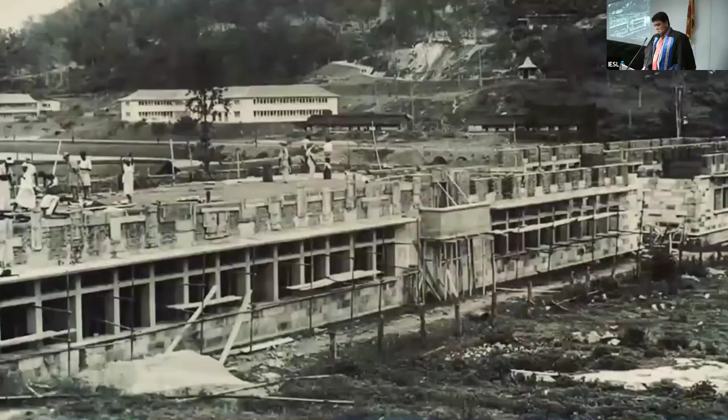As members of the academic and engineering communities, we extend our sincere gratitude to our institution for commemorating the legacy of the late Professor E.O.E. Pereira, widely regarded as the father of modern engineering education in Sri Lanka, through this annual memorial oration. This year's event is particularly significant as it coincides not only with the 118th anniversary of his birth, but also with the 75th Diamond Jubilee of the Faculty of Engineering, which he was instrumental in founding.

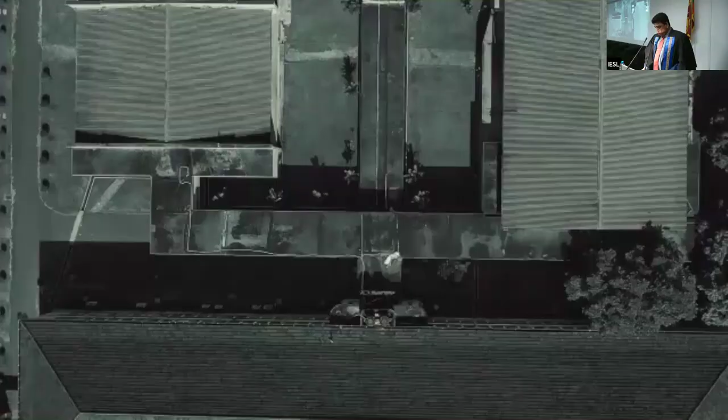At the commencement of this oration, I would like to take a moment to reflect on the enduring legacy of Professor E.O.E. Pereira, whose visionary leadership and unwavering commitment laid the foundation for the advancement of engineering education in Sri Lanka as we know it today. Today, as we gather to honor the memory of Engineer Professor E.O.E. Pereira, we reflect upon the life and legacy of a visionary who not only founded the Faculty of Engineering, but also dedicated himself to shaping it into the distinguished institution it is today.

His efforts extended far beyond the mere establishment of the faculty. He was, in essence, laying the foundations for the future of engineering education in Sri Lanka. Professor Pereira envisioned a faculty that would serve not only the immediate needs of his time, but also endure as a beacon of academic excellence for generations to come. He championed the creation of an institution equipped with spacious lecture halls, state-of-the-art laboratories, and architecturally significant buildings that embodied both scholarly ambition and national pride.

In 1957, when he was asked to scale down his specifications for infrastructure and equipment, he chose to tender his resignation rather than compromise on his vision. This singular act of integrity and courage came to define his character and unwavering commitment. Had Professor Pereira yielded to external pressure, our faculty would not today stand as a symbol of prestige among university institutions in this country, nor would Sri Lanka have been able to cultivate and produce the vast cadre of engineers who now serve both nationally and beyond.

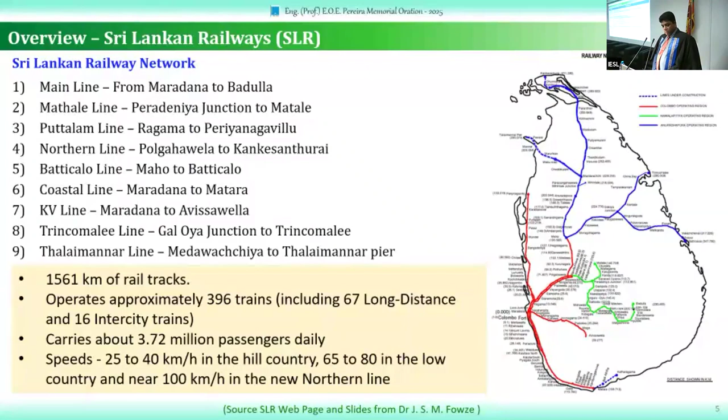If I give some quick key information on the rail track, we have a broad gauge system, 1,676 millimeter broad gauge, which was basically adopted during the British colonial era, in line with Indian railway practice. Our design speed is about 120 kilometers per hour, but the permissible speed is basically about 100 kilometers per hour.

Originally, the sleepers used in these rail tracks were hardwood sleepers, from teak, kumbuk, and jak type of trees. In recent times, we have been using pre-stressed concrete in most areas.

The ballast, which is my key area of research that I will be sharing today, is traditionally rock material - gneiss, granite, biotite. Those are the parent rock materials used for ballast, typically 20 to 63 millimeters in size. The gradation we use is basically adapted from the Indian standard with some adaptation using BS sieve sizes. The ballast thickness varies from 200 to 300 millimeters depending on the class of lines.

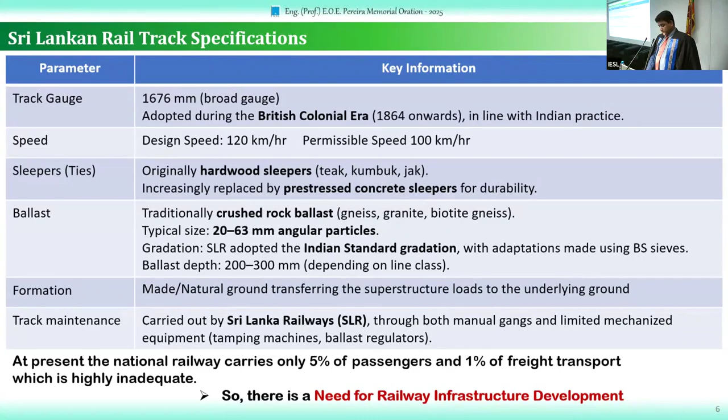Let me talk about this material, ballast, which is one of the key elements in the railway track system. We also know that this railway transport system is one of the most popular modes of transport, not only in many parts of Asia but all over the world.

There are many advantages we have against road transport, and this special ballast material is a traditionally used material. So this ballasted railway system is widely used all over the world. There are key advantages to using this ballast material, which is the main load-bearing material.

It is the one transferring the load from the sleepers to the underlying formations, minimizing the growth of vegetation, providing very good drainage, and also providing lateral resistance. So this is one of the key elements in rail track system.

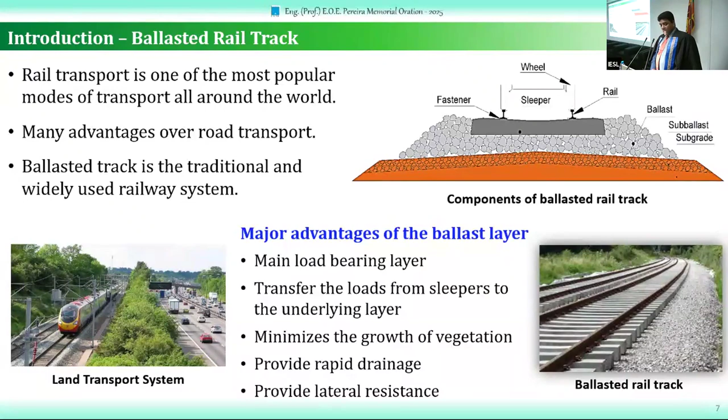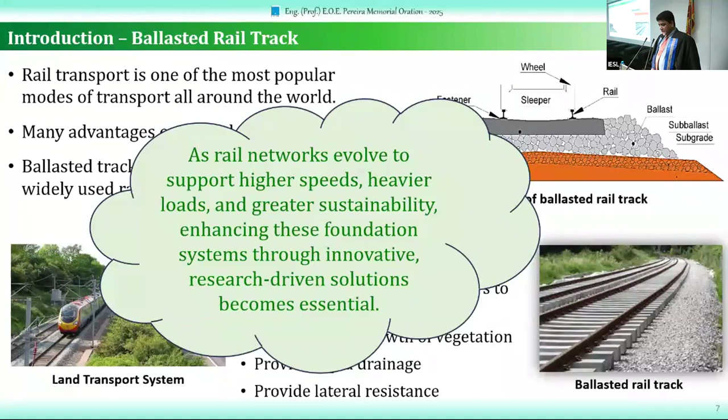As rail networks evolve to support higher speed and heavier loads, that's what we are looking at improving in this railway system, and also looking at greater sustainability. Enhancing this foundation system through innovative research-driven solutions becomes essential, so we need to do something to improve our system.

So for today, I have a number of topics that I will be sharing based on our research and innovations, from academic research to innovative industry applications, starting with ballast gradation for Sri Lanka rail tracks, and impacts of fouling on the shear, degradation and permeability of ballast.

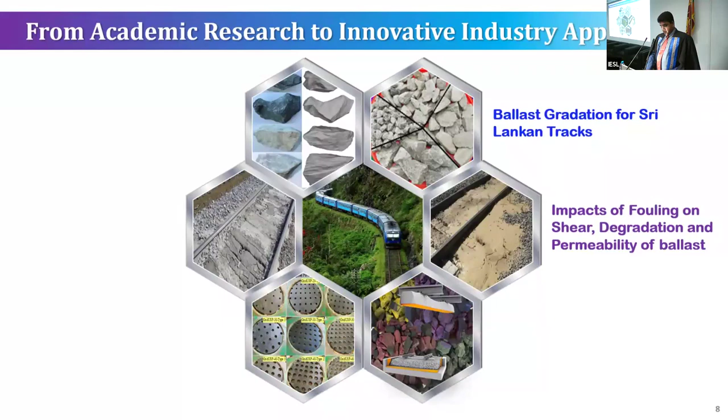Artificial inclusions used in rail track, something like under-sleeper pad, under-ballast mat, and shredded rubber. These are the materials used to stabilize the rail track. And sleeper-ballast interface shear resistance, for which we have come up with a new material. We have applied a patent also for that.

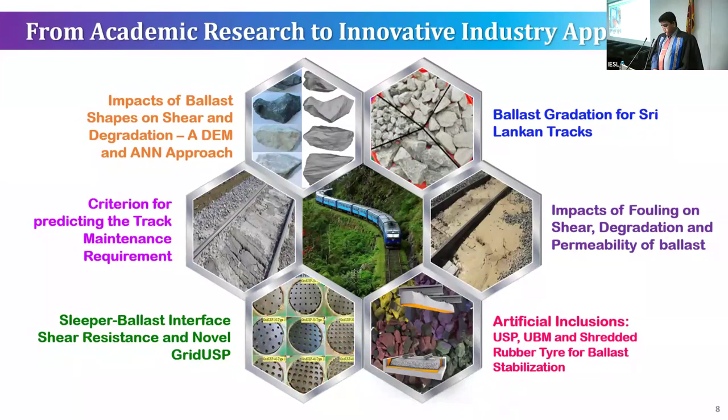And criterion for predicting track maintenance. And lastly, the impact of ballast shapes on shear and degradation using a discrete element model and artificial neural network approach. So before I go into each topic, I just wanted to let others know that...

...at the Department of Civil Engineering, University of Peradeniya, we have built state-of-the-art large-scale testing facilities in the recent past, for the past 5-6 years. The first machine, you can see, is the large-scale dynamic actuator, where you can test a real rail track in the laboratory.

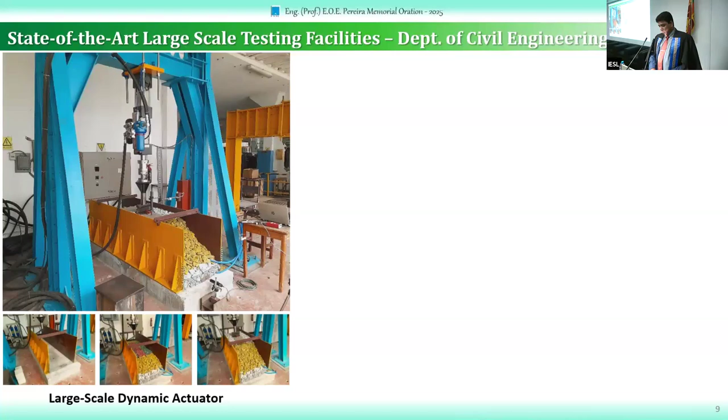The rail track underneath this machine is a unit cell of an actual rail track. The second equipment we custom-built at the department is a direct shear apparatus, where we can test full-size ballast material.

And again, the third one is the large-scale constant head permeability apparatus, where we can do this full-size material testing. These types of large-scale testing apparatus are very, very important for this type of railway material testing, because this ballast material, coarse granular material, size ranges from 20 to 65, where traditional testing equipment won't fit these material sizes.

So we need to either downgrade the size, something like a parallel gradation, or we have to go for a large-scale apparatus. Downgrading the size with parallel gradation gives a lot of limitations. So, based on the experience I gathered at the University of Wollongong, Australia, for the last 6 years, we have been building these pieces of equipment where we can test many different things about railways.

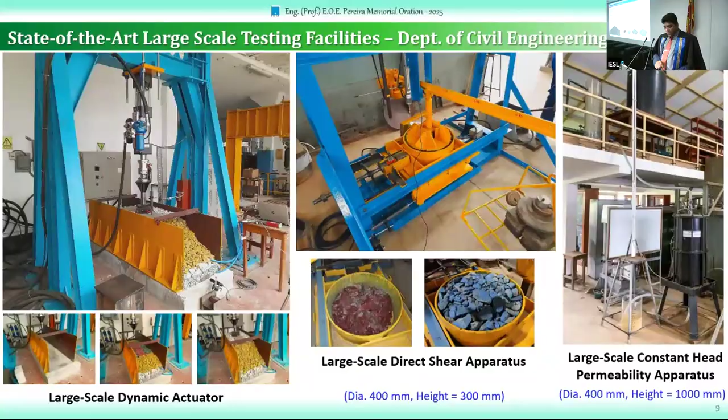So the first topic, the gradation of the Sri Lankan tracks. See, the particle size distribution, the coarse granular material used in rail track, is to give the shear strength of the track when the train is passing through it. So it is a very good material for the shear strength.

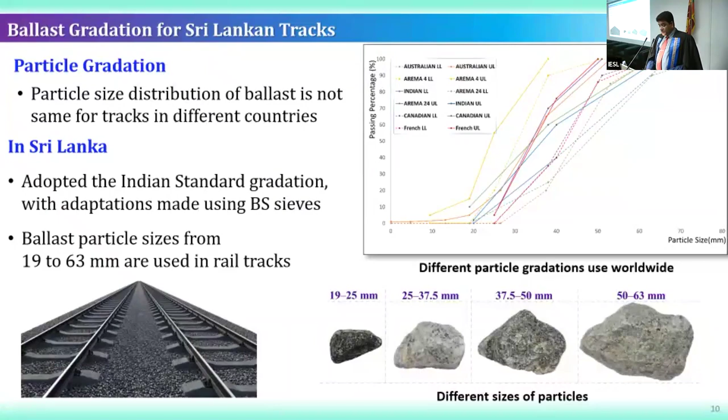But until now, we are practicing with the Indian standard gradation, which is adapted from that system, and we are changing it a little bit with the BS sieve sizes. The ballast particle, as I already said, ranges from 19 to 63. You can see the ballast gradations of various countries and how they differ. But we don't have a ballast gradation for Sri Lanka, and we are using the Indian standard gradation.

So considering that, our project team came up with a plan: why not produce our own gradation? For that, this is an ongoing project. We have so far collected materials from 7 places that are supplying ballast material to the railway system in Sri Lanka. We have collected the material and tested most of the sites, and there are still a few more sites to test.

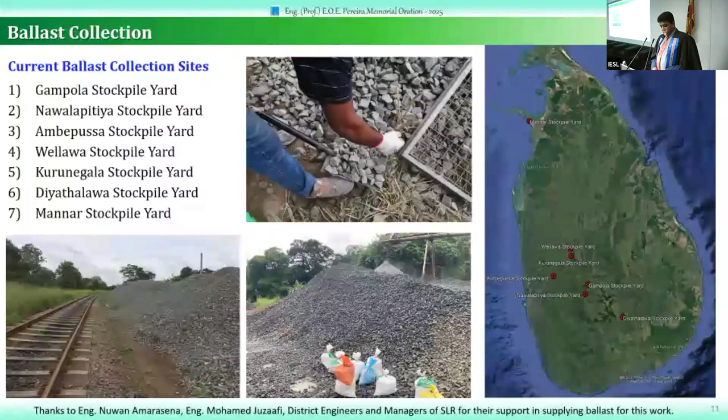At this time, I just wanted to thank Engineer Nuwan Amarasena and Engineer Mohamed Juzaafi at the SLR for supporting us in getting this material, and also the district engineers of these different places and the managers for getting this material to our laboratories.

So we wanted to check the gradation a little outside the Indian gradation range to check whether there is any better gradation we can adopt. We considered 3 different gradations: one at the middle of the Indian gradation range, and 2 outside the range.

The one outside the range on one side, we increased the smaller size particles, while on the other side, we increased the larger size particles. So there are 3 different gradations, and we used this material to test in our large-scale testing apparatus.

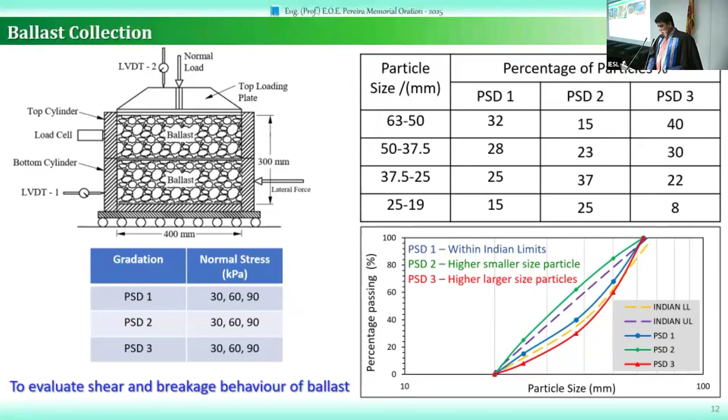You can see here we are coloring the ballast particles. That is because after the testing we wanted to analyze how these particles are degraded. So the different layers we are putting different colors, so that after the test we can separate based on the color and analyze how much the material degraded or broke during this direct shear testing.

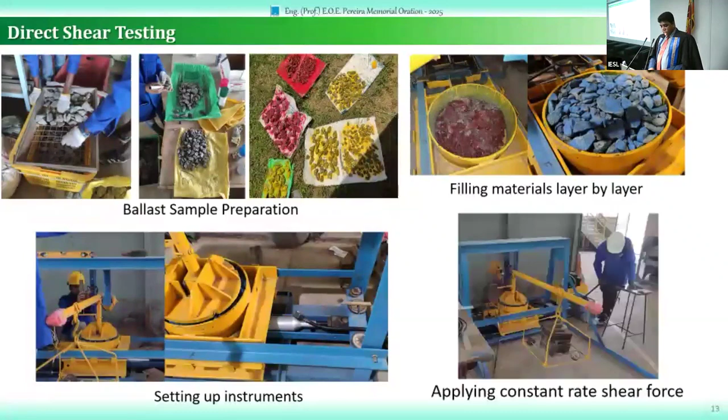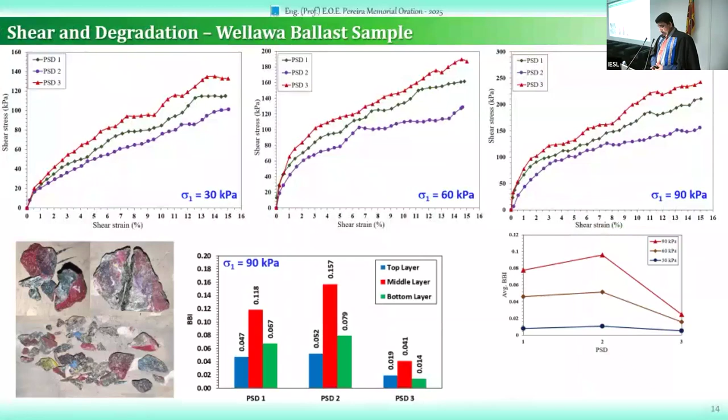Based on these findings, we come up with this conclusion: PSD3, which has a larger amount of larger size particles, is performing better than the Indian gradation limit, and also better than the smaller particle gradation we checked. So not only does it enhance the shear, it also reduces ballast degradation. Ballast degradation is one of the key parameters which decide how frequently you need to do track maintenance. So reducing the ballast degradation is one advantage where you can delay the maintenance work and save money and time.

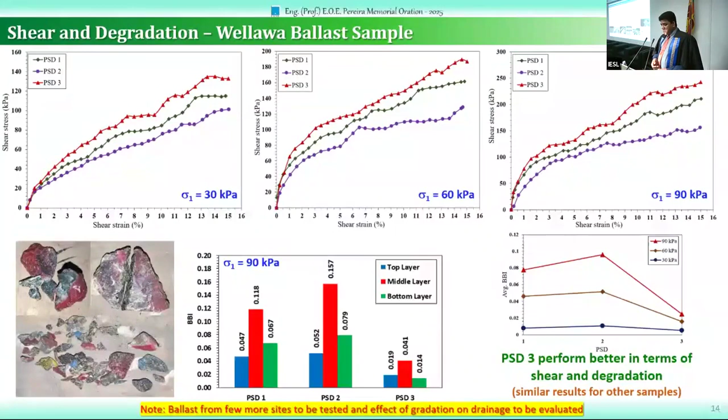As I said, this project is an ongoing project. We still have to test more material from the sites. And not only the shear test, we have to do the permeability test also for this material. Even though these coarse granular materials are good in permeability, there is one other item I'll be discussing here: ballast fouling. When the ballast gets fouled, the permeability is a problem. So we need to check for different gradations what happens when the ballast is fouling.

What is ballast fouling? Ballast fouling is whatever foreign material gets into this ballast layer. Basically, material size less than the 9.5 millimeter sieve is called foul material. This comes from many different sources: particles from abrasion, corner breakage, and splitting of existing ballast particles while the train is in service, and infiltration of fine foreign particles from the track surface, especially during coal transport.

This is a biggest problem in Australian rail tracks, because coal always spills on the rail track and contaminates the ballast layer. Subballast and subgrade infiltration by pumping of fines from the sublayers, especially in coastal areas - when the train is running, cyclic load pumps this fine underneath layer up to contaminate the ballast layer. Also, in some cases, the concrete sleeper wears and contaminates the ballast, and particles washed out from water - specifically this type of problem is prominent in hill country tracks. And also wind blown sand particles near desert and beach areas - that is also one way that ballast gets fouled.

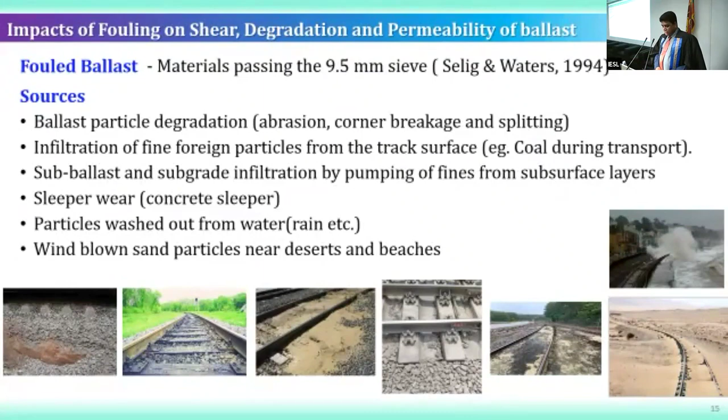We mimic this type of ballast fouling in the laboratory by adding different types of foreign materials - quarry dust, sand foul ballast, clay foul ballast - and we check the shear and permeability behavior of this ballast. We come to a conclusion. We generally found that fresh ballast is very good in shear, but when it is contaminated, especially with clay and sand, it compromises the shear strength.

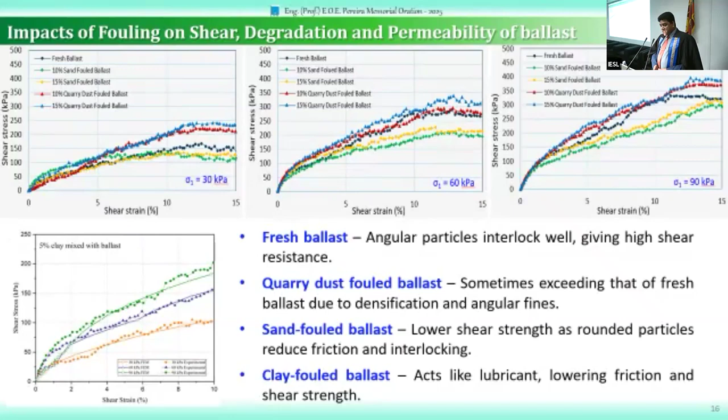Even though this ballast is showing a little higher shear strength, that is because the quarry dust this is coming from has a higher strength, so we are having a higher shear strength. But generally, this foul material is compromising the shear strength. So we have to be very careful about this type of ballast getting fouled.

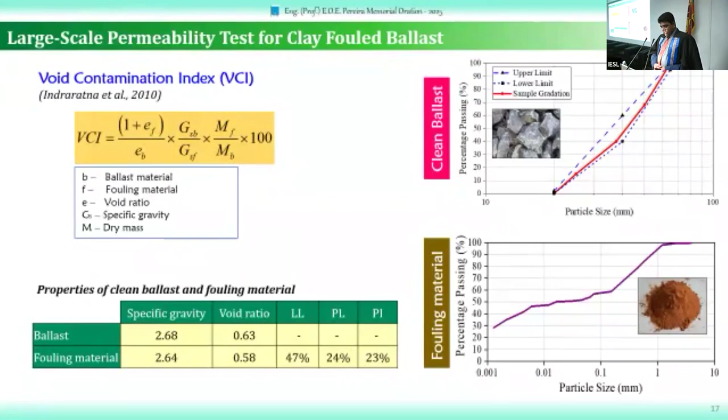Now we know that the ballast gets fouled by this material. We wanted to find a solution, like how we can help railway engineers clean or maintain their tracks whenever this ballast fouling is happening. For that, we started one study by checking the void contamination index - how much void is in the ballast layer - based on the method proposed by Indraratna et al. 2010. We came up with this void contamination index to calculate how much of a layer is contaminated.

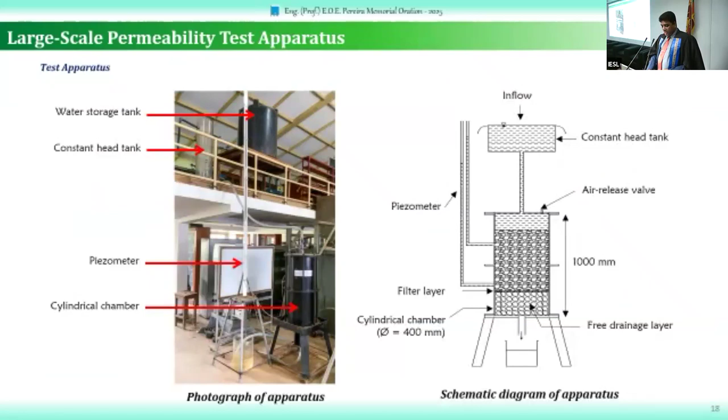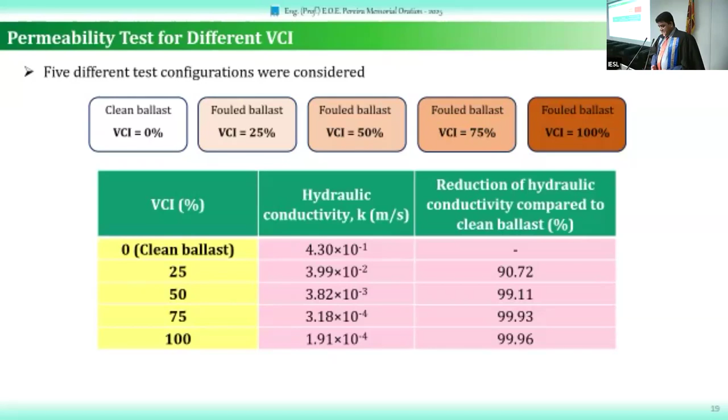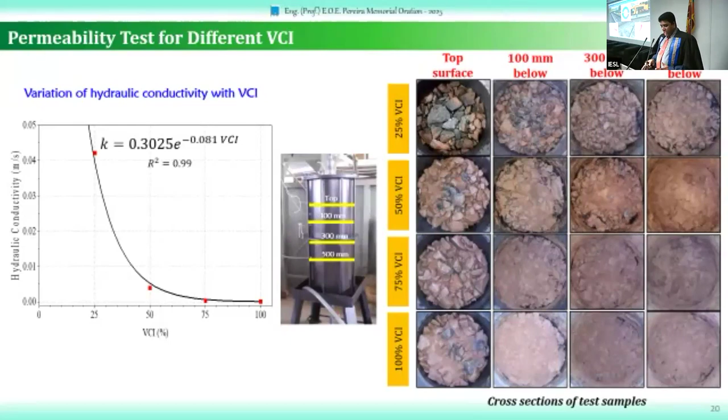We thought of giving a solution for railway engineers, since doing a permeability test and finding how much this material is contaminated is not an easy task, especially in a laboratory. So we thought of coming up with a smaller, simpler test so we can decide whether we need to clean the rail track or not.

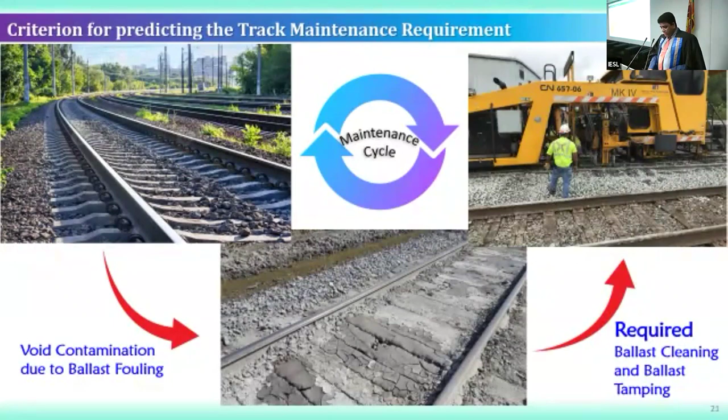So for that, we came up with a 2D numerical model. Based on these results, we developed this numerical model for various levels of fouling in the track system, like the shoulder ballast system and the middle ballast layer. We introduced different levels of contamination and checked the drainage capacity, comparing it with a critical drainage capacity, which is based on the rainfall of that area.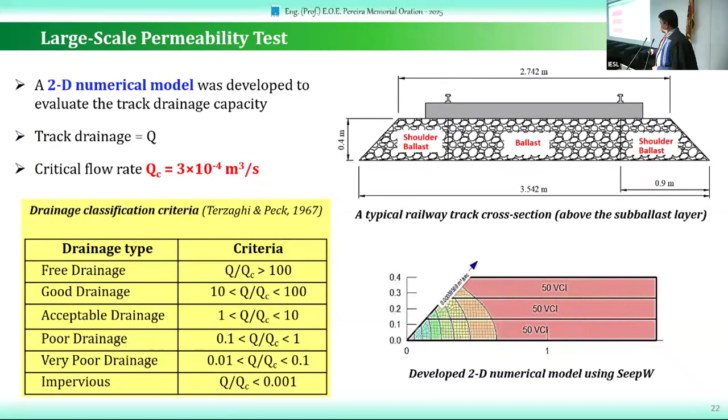So when we know the rainfall of a particular area, we can come up with this critical drainage value. Then, by doing many permeability tests in the laboratory based on the Terzaghi and Peck 1967 criteria, and using this numerical model for the various layers, we came up with the criteria. For that, we used 3 different models. The first model is when 2 layers of the ballast layer are contaminated, or if you divide it into 3 layers. And what happens if you have a separate layer called the shoulder ballast layer, when that is contaminated?

Based on our results, railway engineers can collect one sample from the site and simply do a particle size analysis—no need to do the permeability test, which is high-end and not very easy, especially for large scale testing. Just doing one simple sieve analysis test tells you how much contamination is in a particular layer, and by using the chart developed using this QC value...

Whenever you are dealing with a different track, you can come up with a different QC value and make a different chart for that particular rail line. Then, based on this value, your Q over QC, and the contamination value, you calculate the Q over QC ratio. Wherever this Q over QC ratio falls will tell you whether you need maintenance work, whether you need to clean the ballast or not.

So for model 1, model 2, and model 3, based on our findings, model 3 is the most critical one because of this layer. When water enters the rail system during heavy rain, it tries to leave the track in the lateral direction. So when this layer is highly contaminated, the entire track system is damaged—we can see derailment and a lot of damage.

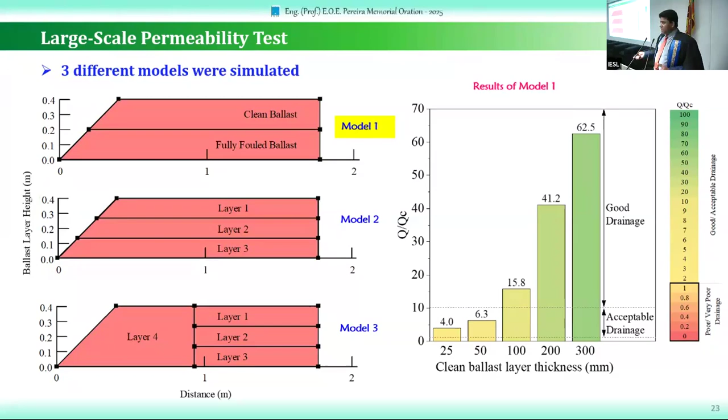So our study shows that with model 3, when the engineer wants to check the conditions of the rail track, they can take one sample here, one sample here, one sample at this level, one sample—4 different samples—just run the particle size distribution and find the Q over QC value. Wherever the Q over QC value fits gives the criteria of whether cleaning or maintenance is required or not.

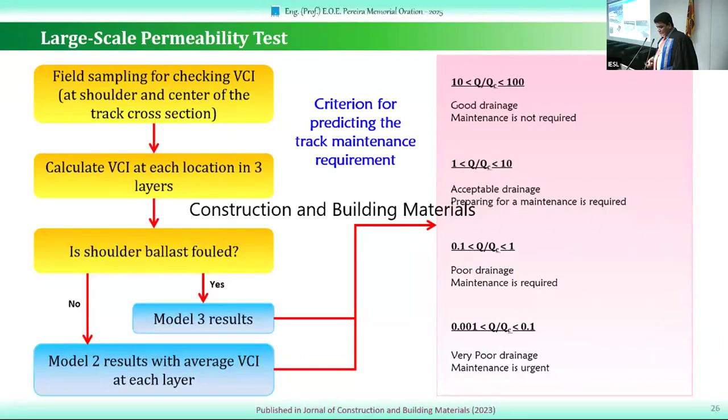So based on the Q over QC value, if it is very high, you don't need maintenance—it already has good drainage. But wherever you have a very low Q over QC value, you need to start cleaning work. Or in some cases, it will tell the railway engineers they need to prepare for maintenance in the coming months. So this type of criterion will help save time and predict problems that may come in the future related to maintenance work. The second work is artificial inclusions for rail track improvements.

Nowadays many researchers are working on how we can improve rail track for faster and heavier trains. In Sri Lanka, we are trying to go more than 100 km/h on most lines, maybe except the upcountry line, which needs a lot of improvement. But whenever we go beyond 100 km/h, that is where we start to face problems.

Degradation, derailment, and vibrations are common problems. These artificial inclusions, such as rubber pads, are very good solutions. There is one called the under sleeper pad, glued directly under the sleeper, and another called the under ballast mat, placed below the ballast layer. These are two different layers where you can introduce and reduce vibration, reduce hard contact between the concrete sleeper and the ballast, and distribute pressure evenly to minimize ballast damage.

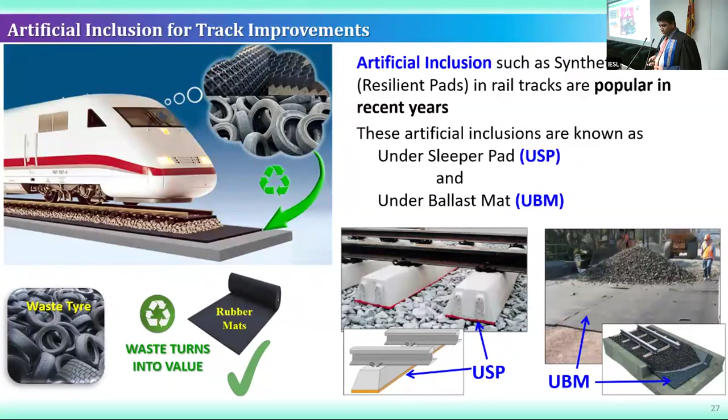These things were tested thanks to the University of Wollongong, Australia, where I tested, and the idea of building the facilities in our department here came from the experience I gathered there. You can see a similar large-scale testing apparatus. I spent about 3 years with this machine, a cyclic dynamic actuator, where we tested the under sleeper pad and under ballast mat.

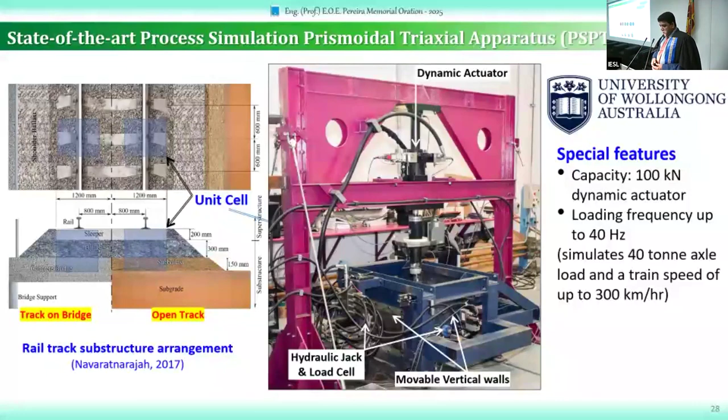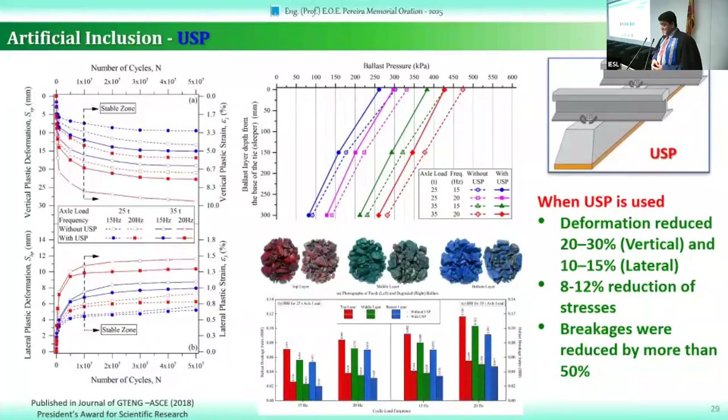The results show very significant improvement when we introduce this under sleeper pad: about 20 to 30% reduction in vertical deformation, 10 to 15% in lateral deformation, reduction of stress up to 12%, and especially the degradation or ballast damage can be reduced more than 50%, which is very significant. You can see the degradation analysis after the testing.

After testing for 5,000 loading cycles, we see this very discrete contact, whereas when you introduce the rubber, the area of contact is significantly more distributed. This clearly tells how hard the contact is between the ballast material and the concrete when discrete, and how introducing the rubber evenly distributes it.

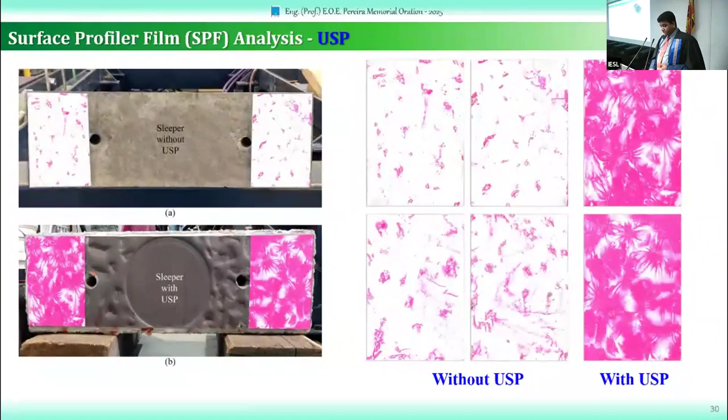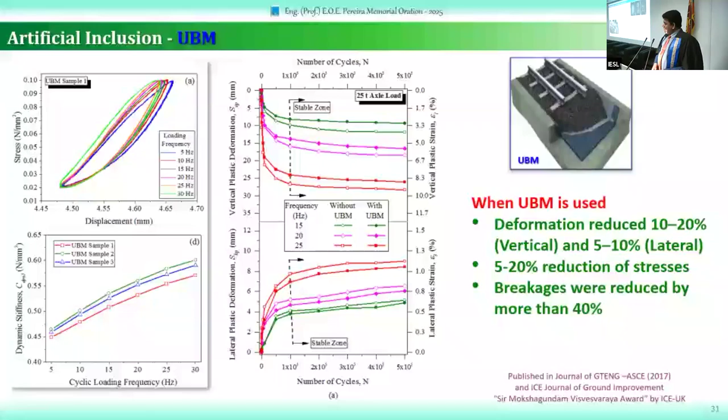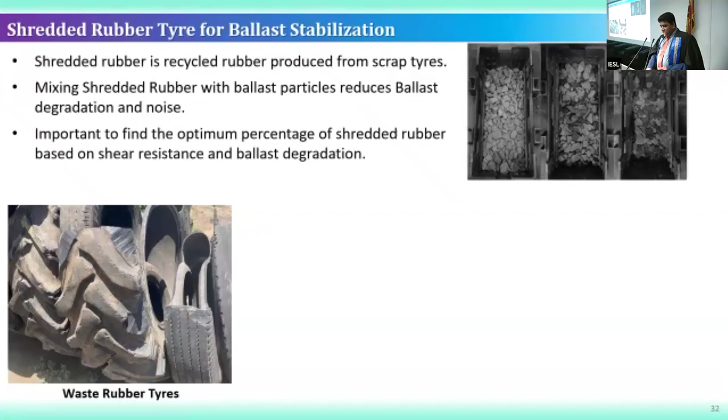Then we have rubber going on top of the ballast layer, and rubber going at the bottom of the ballast layer. Why not rubber in between, or within the ballast layer itself? So we thought of that and introduced testing including rubber particles in the ballast. What we did is take waste tires, especially large tractor tires, cut them to almost the size of the ballast, similar in shape, and mix them into the ballast layer. We tested various things including shear and degradation, and also modeled this in the discrete element model.

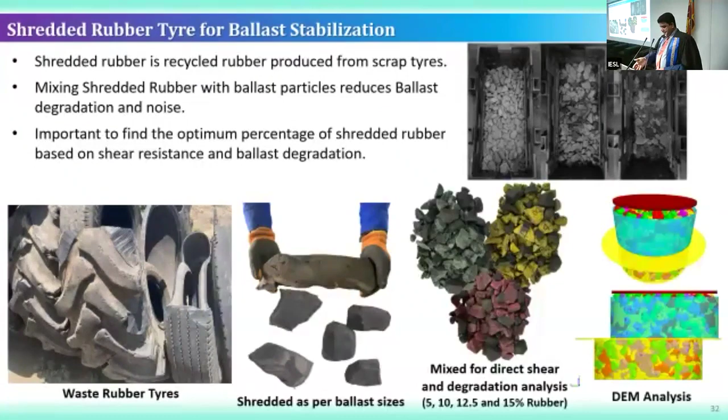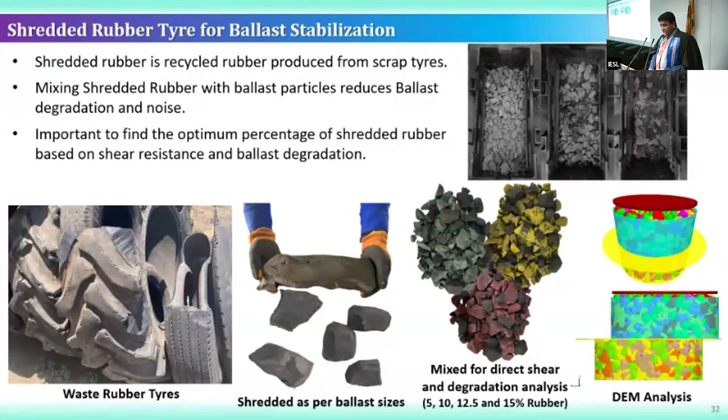This is one of the great tools for this type of ballast material, where granular discrete materials can be easily modeled in the discrete element model rather than the finite element model, which is a continuum model and most of the time not suitable. So we came up with these results. You can see here the discrete element model. Basically what we do is take a realistic ballast particle, scan it with 3D scanning, and take this 3D scanned particle as a CAD particle into the program, which will then deal with the exact ballast particle. That's the speciality of this discrete element model.

So we are testing numerically the actual particles. Based on the numerical and laboratory testing, we found that when introducing 10 to 15% shredded rubber by weight to the ballast layer, we can reduce a significant amount of degradation, even though there is a little compromise in direct shear or shear resistance, as we know these rubber particles have less stiffness than the ballast particle.

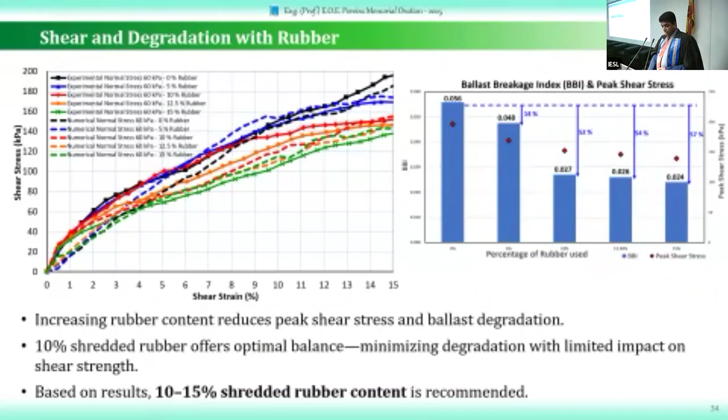That will reduce the shear resistance, but in terms of degradation, we can significantly bring down the degradation level. We have already tested these rubber pads for under sleeper pad and under ballast mat, and they are working well.

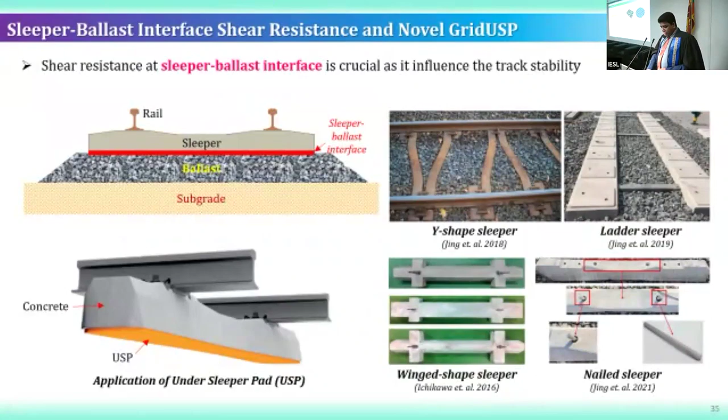In our recent project, where we received a 40 million research grant from the World Bank, the AHEAD project, which we completed two years ago, we came up with modifying this under sleeper pad using a novel grid USP. We know geogrids are used in civil engineering projects, so we thought why not mimic this geogrid into the rubber and make it a geogrid-plus-rubber type material. We came up with this new material and already applied for a patent, which is in progress now.

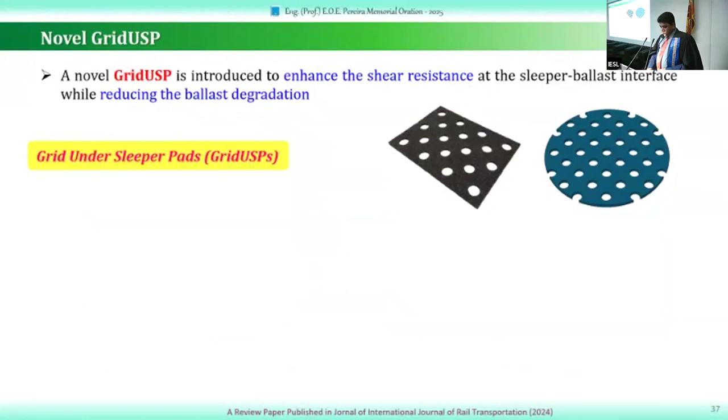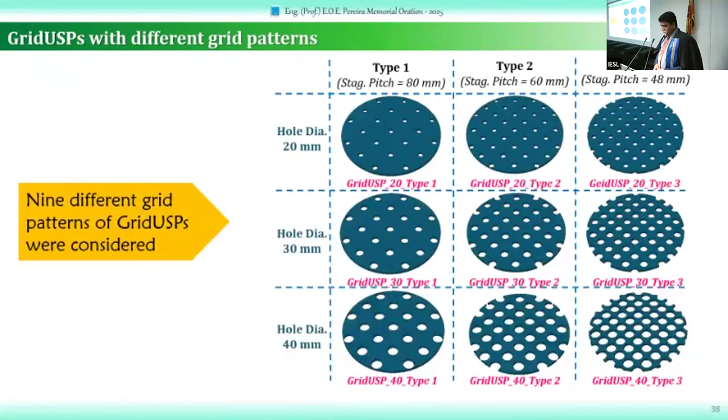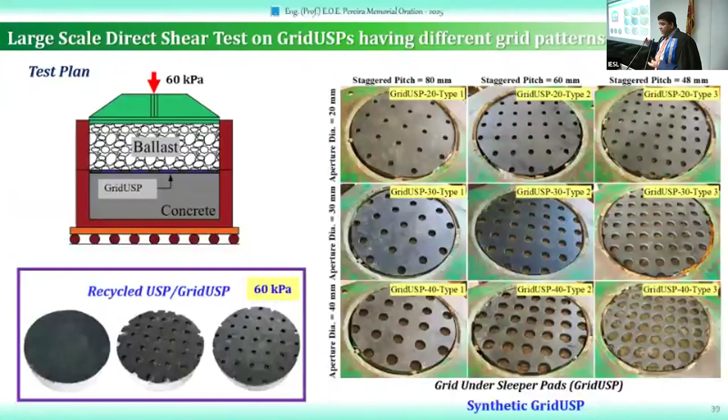We tested this grid under sleeper pad material in the laboratory with various sizes, aperture openings, and spacing. We tested 9 different sections using synthetic rubbers. We also tested recycled rubbers, made from granulated waste tires formed into sheets, and from that rubber we made these grid under sleeper pads.

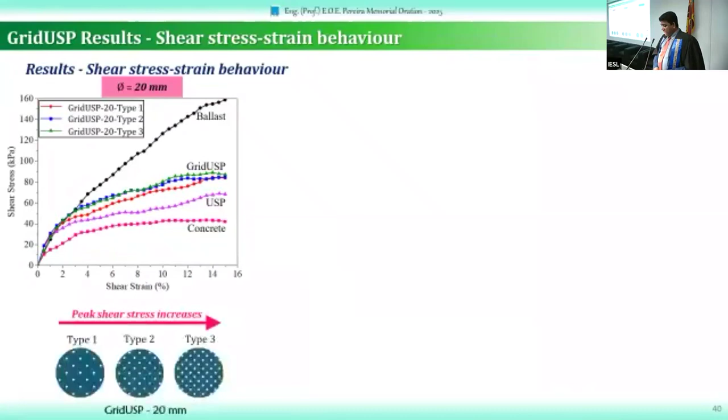The test results are promising. You can see the grid under sleeper pad significantly increased the shear resistance compared to plain rubber, increasing the shear strength of the ballast layer.

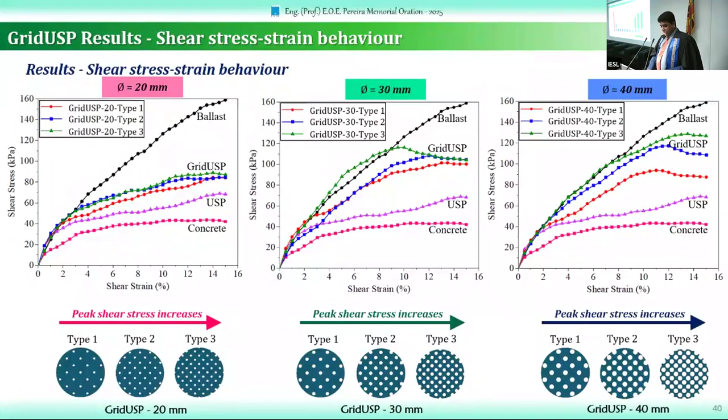For the various cross sections we tested, when we increase the aperture size, the shear strength goes higher, but there are limitations. We cannot make the opening as large as we want, because once the openings get too large, we lose the rubber needed to distribute the load and make the material surface act as a cushion.

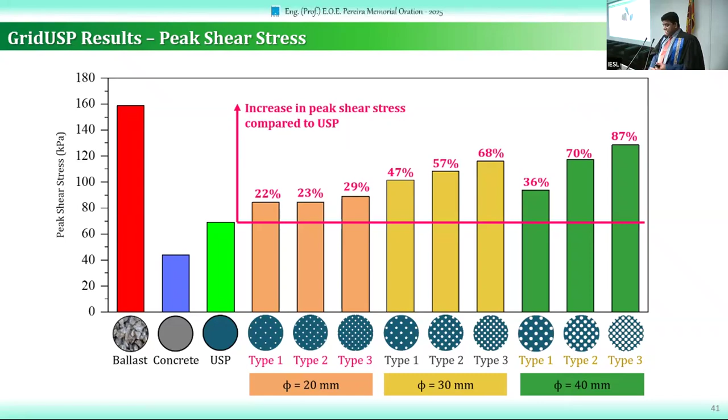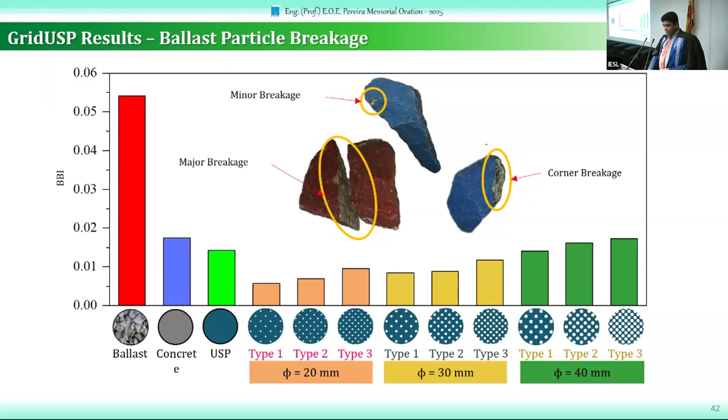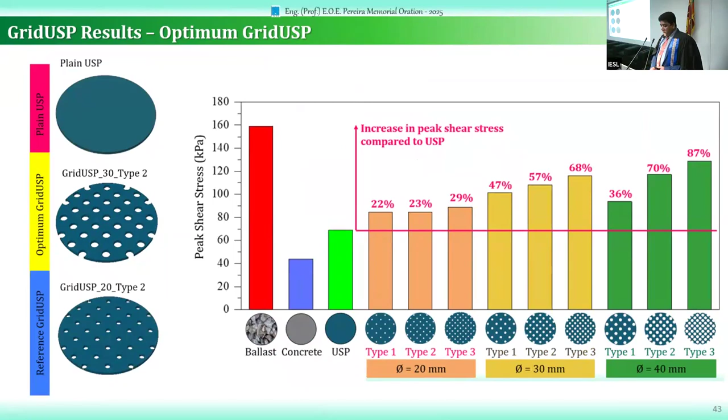So this is the one we propose in our innovation: this type of grid under sleeper pad can be used instead of the standard under sleeper pad, both to increase shear resistance and decrease degradation. This result shows our findings.

At the same time, we tested two different materials, synthetic and recycled, since using recycled material is always good for infrastructure development. We found that the recycled materials also perform very well in this rail track application.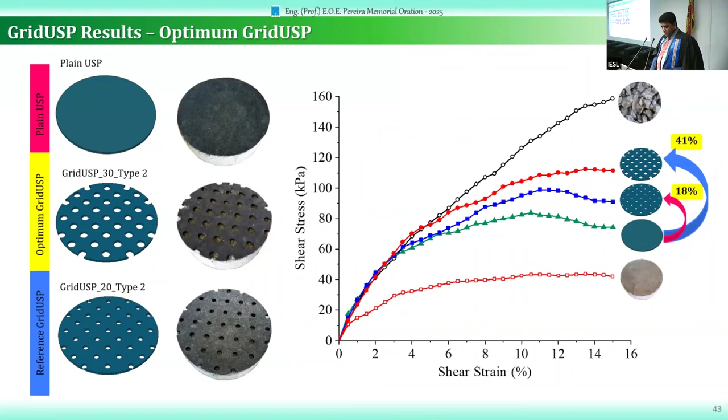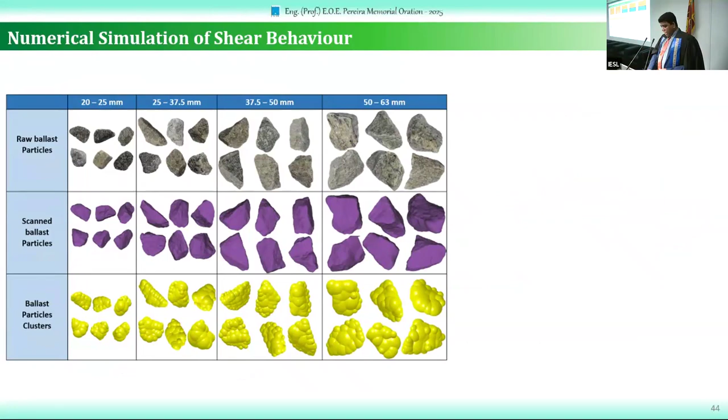We put all these things together into a discrete element model. We 3D scanned a lot of ballast particles representing the ballast layers, put them into CAD, and converted them into DEM elements for the software. We tested many different models, and our laboratory findings coincide with this numerical analysis.

This type of laboratory testing takes a lot of time, so if we can simulate these things in the discrete element or numerical models, we don't need to run as many tests. After doing some physical tests, we can extend further with the numerical model. That's what we did in this study, and the findings are good even for higher stresses.

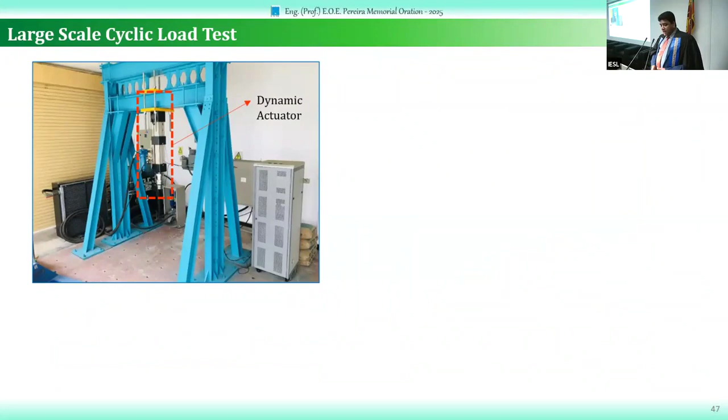We also tested the grid under sleeper pad in our large-scale cyclic load apparatus, where we apply cyclic loading very similar to when the wheel is rolling on top of the rail, basically a sinusoidal waveform, which we can apply in our recently built cyclic apparatus.

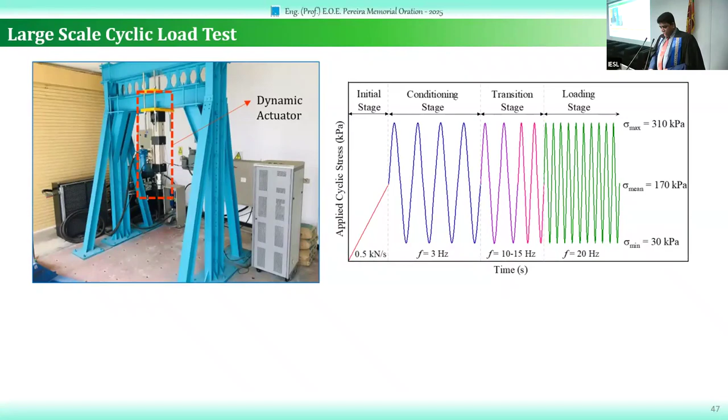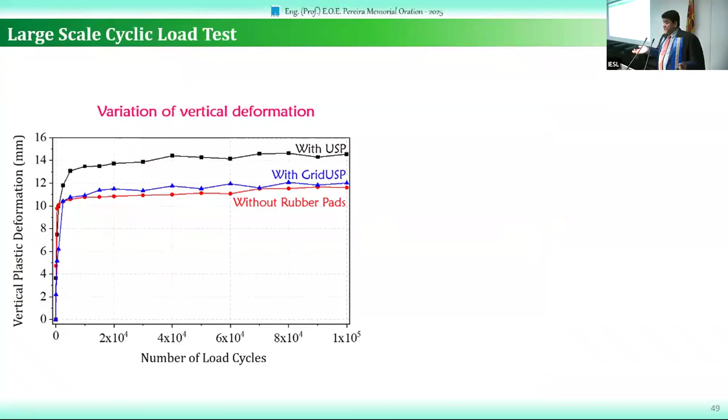For that, we made a unit cell of a real rail track in the laboratory and tested this grid under sleeper pad. We found that even under cyclic loading there is a significant reduction in lateral deformation, which is why we added the grid - because we want the track not to laterally slide, since lateral sliding can lead to derailments. This grid under sleeper pad significantly reduces lateral sliding and can be used in rail track.

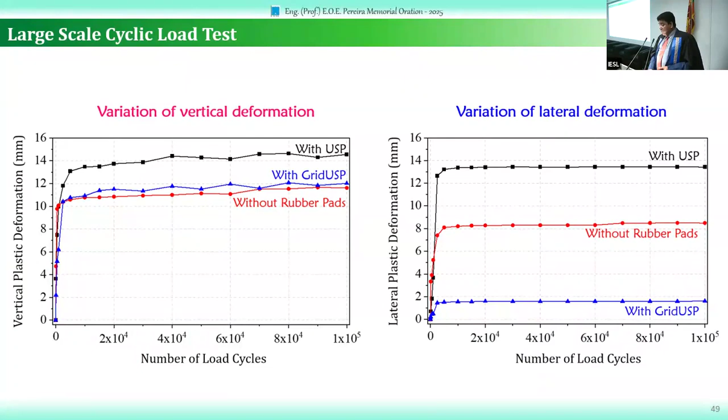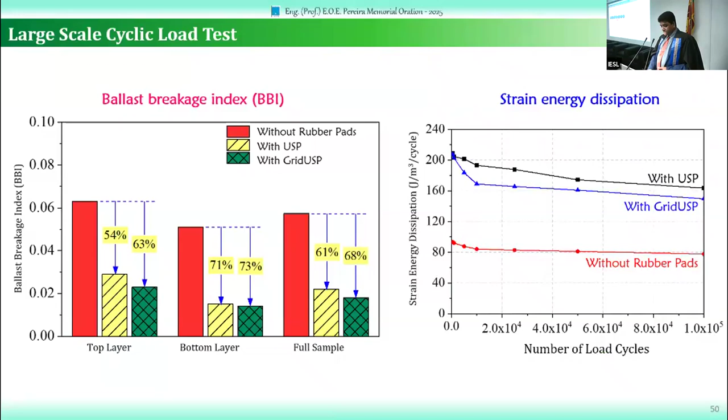We also tested the ballast breakage after the cyclic loading test, and found that these rubber pad grid under sleeper pads are working very well.

Then in my last research work, nowadays AI is everywhere. I mean, take any field, AI is there.

Neural network model, what we did is this DEM analysis running in the laboratory. We have a supercomputer with something around 48 processors. With that, sometimes it takes like 5 days to run one single test, because this numerical analysis takes that much time. So why not use artificial intelligence to cut down this numerical analysis work, where we can come up with a model to connect the DEM to the artificial neural network.

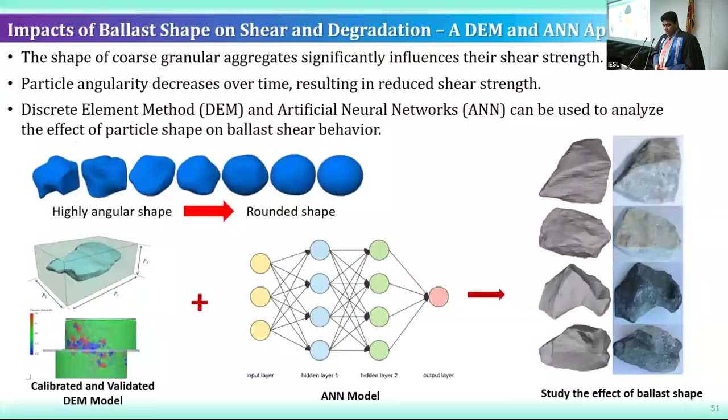Then instead of running this DEM for 5 days, within like 5 seconds your artificial neural network gives the results. So this is a project my students recently worked on and came up with this artificial neural network model, looking at how particle shapes - these ballast particles with various shapes, rounded, more elongated, highly angular - how these particle shapes affect the performance of this material.

For that, we tested many different shapes. There are many different shape indices that we came up with: elongation index, flatness index, aspect ratio, convexity index. With that index, we developed a DEM model, and at the same time we also fed the data from the DEM model to the ANN to come up with this model in the ANN.

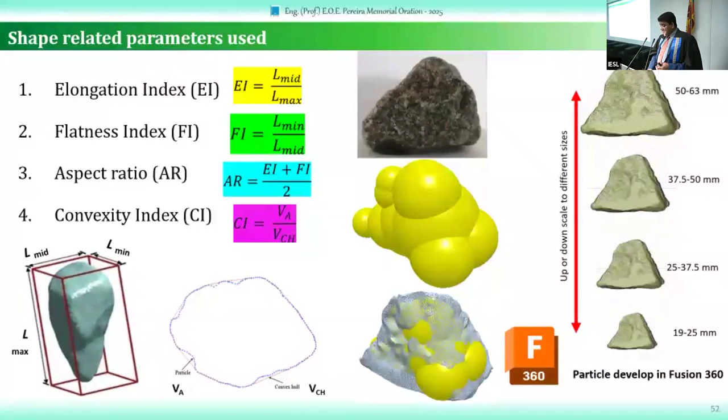Instead of doing a DEM model for 5 days, a simple ANN run will give the data that you require, especially this frictional resistance of these ballast materials.

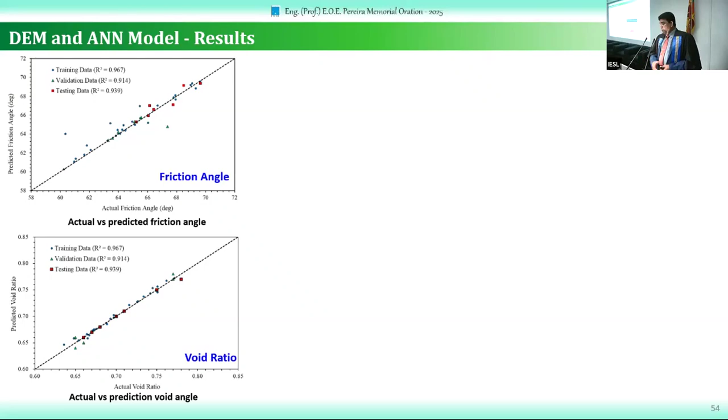And we developed this application where you give a sample particle shape characteristic, and your ANN model will give the shear resistance and void ratio of that particular ballast set, which is very, very good, because running a shear test or a DEM test takes a number of hours and is labor intensive work. But this ANN model quickly tells us what type of shear resistance or friction angle we are looking at. So as initial work, we can use this one.

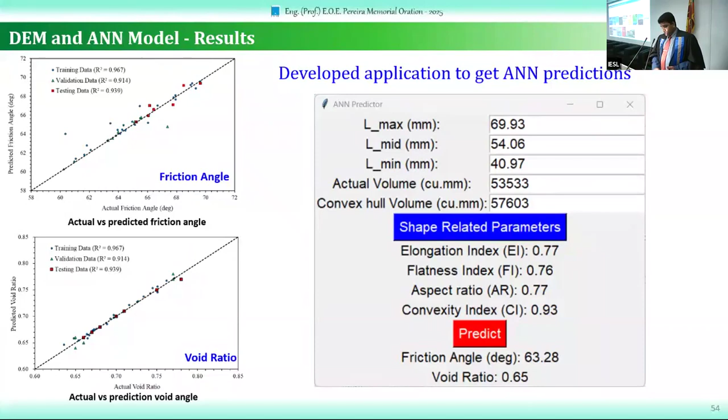So that's all our recent work, and our recent works are published in many journals. I have published more than 50 research publications, including about 12 high impact journals and more than 30 conference papers.

And we also applied for the patent for this grid USP, already in progress with the NIPO.

We are also having a collaboration with the Sri Lankan Railways engineer Nuwan Amarasena. I always call him for any help. We also had a discussion with them when they visited Peradeniya a year back. And we are closely working with Sri Lankan Railways.

One of the things I wanted to happily say is that one of my former students, currently a lecturer at the University of Ruhuna, engineer Dr. Sushan Mayuranga, completed his PhD last year under this AHEAD grant. The novel grid USP that we came up with is from his research work.

We are also collaborating with the University of Ruhuna. Nowadays University of Ruhuna students are coming all the way to Peradeniya and using the facilities that we developed, doing a lot of railway testing. So we are still collaborating and working.

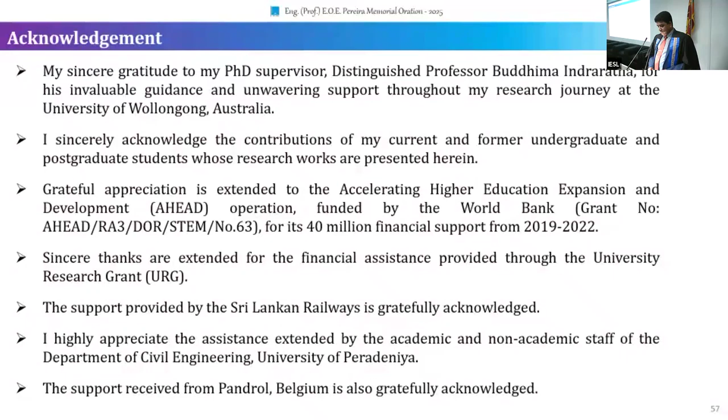Thank you very much, Dr. Raja, for your highly informative and exciting research work. We have our former GMR, Pereira Silva, who is also the transport sector chairman. We have been highly impressed with your work.